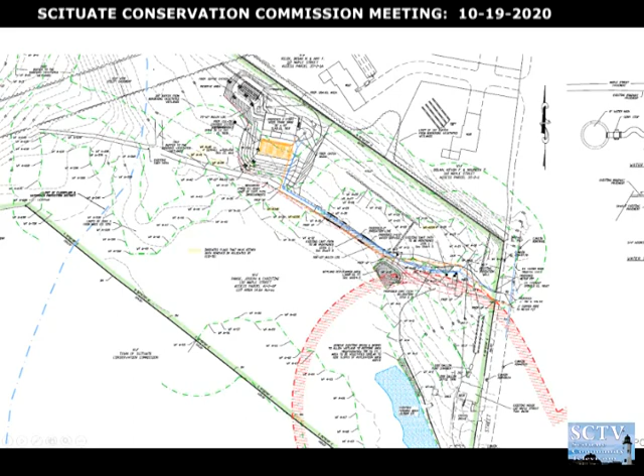So now we're on to 49 Collier Road. All right, this is a new one.

On October 19th, 2020, 5:15 p.m. at the Town Hall, the Scituate Conservation Commission will hold a wetlands hearing under Chapter 131, Section 40 of the Massachusetts General Laws, and Section 30700 of the Town of Scituate Code of Bylaws, regarding the application of Edward Johnson to raze and rebuild a single-family dwelling at 49 Collier Road, Scituate. Abutters and other interested parties are invited to attend. Information to access the virtual meeting will be available on the agenda posted on the town website.

Good evening. Looks like we have Ross Engineering. I don't know. Oh, are they there, Frank? Frank? Yes, Paul. This is Paul. All right, thank you. Got you.

This project at 49 Collier Road is a raze and rebuild of an existing single-family dwelling. For the commission's information, prior to filing with the commission we had 3 meetings with the North River Commission, in which they approved the proposed dwelling. The maximum height is only 35 feet from the finished grade on the riverside to the peak of the roof. The footprint of the proposed house is slightly smaller from left to right - about 8 feet further in depth than the existing one. Prior to filing with the North River Commission and the Conservation Commission, we also spoke to the building department, and after our survey we indicated that the proposed house would not be in the velocity zone.

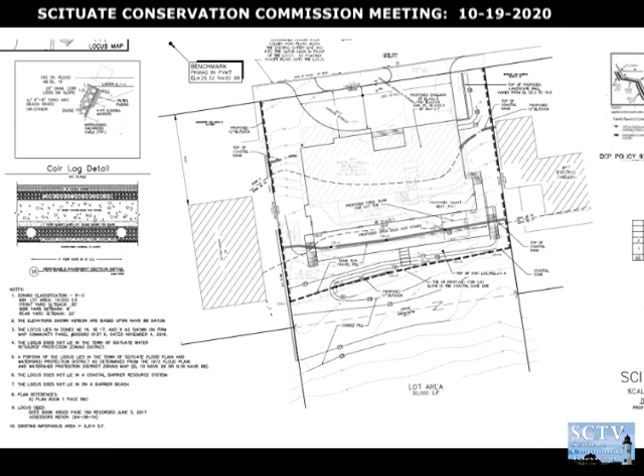That lower portion of the house, where it says open deck and stairs, that's just ground, there's no pavement in there. And the plan you just had shows the hot tub in that area as well, which is outside the velocity zone. That hot tub just sits on the ground.

Sure she can. And the reason we're putting that other plan up, Paul, is it's kind of hard to see on your plan what's existing and what's proposed.

Yeah, there's a lot going on, right? So I just wanted to clear up the resource areas. I believe we agree with Stan that there's coastal dune and coastal bank on the site.

That Penny's talking about is where the toe of the coastal dune is meeting the toe of the bank. You're fading in and out, Amy. Could you hear me at all? Do I need to repeat myself? That's better.

Anyway, so that gully, Penny, you were speaking of, that's approximately where the toe of the coastal dune is meeting the toe of the bank, forming that gully. One of the questions is, we know these coastal resource areas migrate, they move, shift, and migrate—that's what they're supposed to do. So the dune is in fact in a constant state of movement.

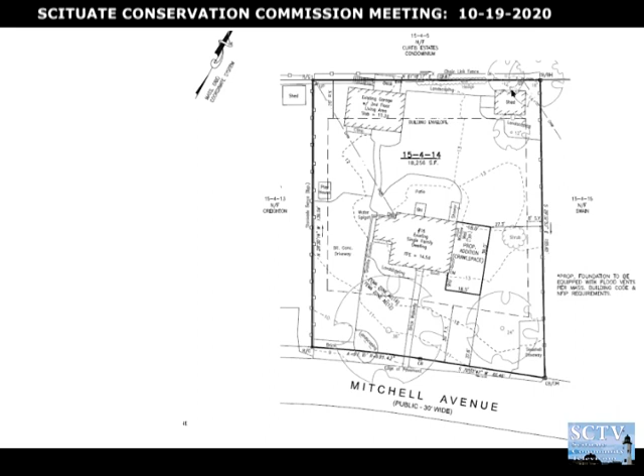So all in favor. Penny? Yes. Jen? Yes. Andy? Yes. Brendan? Yes. Frank? Yes. Great, thank you very much. Thanks, Greg.

Now we're on to 17 Old Farm.

On October 19th, 2020, at 5:15 p.m., the Town of Scituate Conservation Commission will hold a wetlands hearing under Chapter 131, Section 40 of the Massachusetts General Laws and Section 30700 of the Town of Scituate Code of Bylaws regarding the application of Aldana Hamill to raze and rebuild a single-family dwelling located at 17 Old Farm Road, Scituate. Abutters and other interested parties are invited to attend. Information on access to the virtual meeting is available on the agenda posted at the town website.

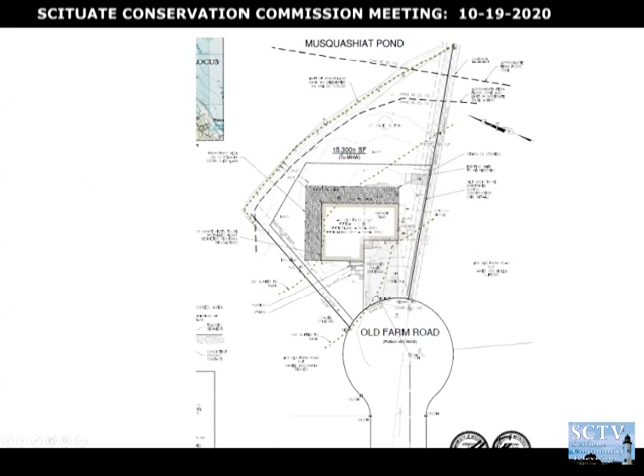So we have an engineer. Yep, Brendan - Brendan Sullivan with Kevin R. Consulting. Hey Brendan, how you doing? Good, how are you? Good. So, geez, I did see the plan just up there for a second.

This is a single-family home at the end of Old Farm Road. Old Farm Road is a dead end off of the northerly end of Hatherly Road. It butts up to Musquashiat Pond. So we're basically taking the existing footprint, the existing one-story footprint, tearing that down, and putting up basically a three-story house with a deck on the easterly and northerly side.

The lot is up against Musquashiat Pond. We have a BVW, we have a floodplain - elevation AE 13 out on the pond side, and then most of the rest of the lot is in elevation AE 11. The existing first floor is about elevation 11.2.

The proposed house's first floor will have no living space - this is the garage. The storage will be at about elevation 8.5 on a concrete slab. The living space will be up at elevation 18.5. We're proposing a new driveway with new access to the front.

We're shifting the driveway off the property line a little bit, reorienting that, and taking down an existing shed that's just outside the 50-foot buffer.

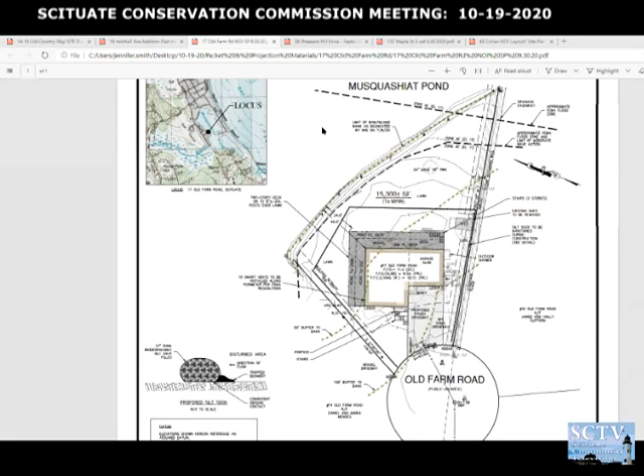14 to 16 Old Country Way. On October 19th, 2020, 5:15 p.m. in the Town Hall, the Scituate Conservation Commission will hold a wetlands hearing under Chapter 131, Section 40 of the Massachusetts General Laws and Section 30700 Town of Scituate Code of Bylaws, regarding the application of Robert Proctor to raze 2 residential dwellings and build 6 residential units and 2 commercial units at dwelling location 14-16 Old Country Way, Scituate. Abutters and other interested parties are invited to attend.

What he's proposing to do is to raze 2 existing single-family dwellings and construct 4 residential units that are attached. They're shown as units 1, 2, 3, and 4 in the plan. And to the rear of the lot, there's a proposed barn building, which will have 2 rental units above the 2 contractors' bays that'll be at the lower level.

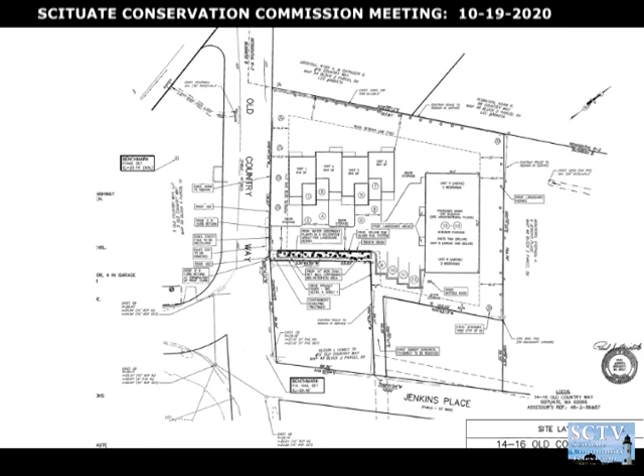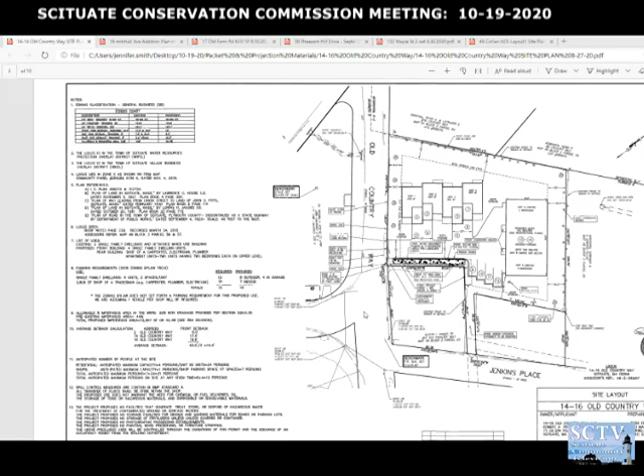That's Jen. There are no wetlands on the site. No, I'm just waiting for the plan. There we go.

Okay, there are no wetlands on the site. The resource areas are actually off-site. As you look at the plan on the property to the right, there's an existing open-ended pipe. The entrance to the pipe is considered the top of an inland bank, which is a resource area. And from there, we show the 50 and the 100-foot buffer zone that do come onto the property.

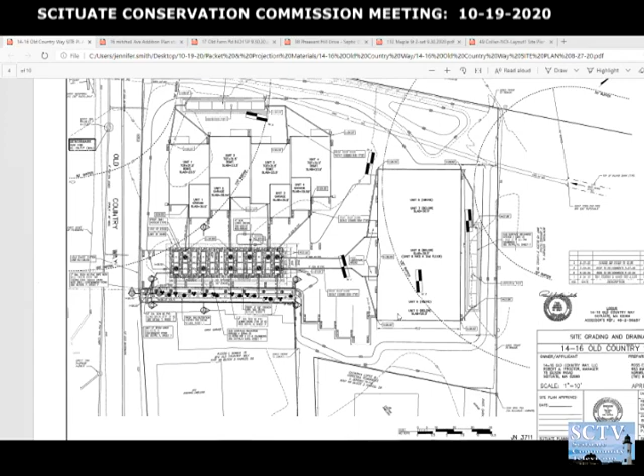On the left side of the plan, over at Old Country Way, there's the outlet of that pipe that runs through the property. There's another head wall where the water outlets. That's also the top of an inland bank. And from there, we show the 50 and 100-foot buffer zone onto the property.

That pipe is completely enclosed to the site. It's a 24-inch reinforced concrete pipe. We did put a camera down it to inspect it and also locate it as well. The pipe is virtually flat. That is not considered a resource area under the DEP wetland regulations.

I verified that with Greg DeCisa and Brad Holmes as well. Reason being that it's completely enclosed and is buried. There are no changes to the pipe. That's going to stay right exactly where it is. So having said that, this project has been resolved to a buffer zone project for work being done within 100 feet of those, of the end of those two head walls I previously described.

To the rear of the property, there's a proposed barn, which will have 2 apartments above it and 2 contractors' bays. The bays have been reduced from 3 to 2. That's an enclosed structure. We're also capturing the roof runoff and putting it into a subsurface recharge system at the rear of the building. That's shown on the plan as well.

Moving over to the left in the other buffer zone, 2 of those proposed units and a small portion of a third one are between 50 and 100 feet of the head wall on the other side of Old Country Way. We're proposing a recharge unit to the rear of that building as well. All of the other work on the site is outside the buffer zone.

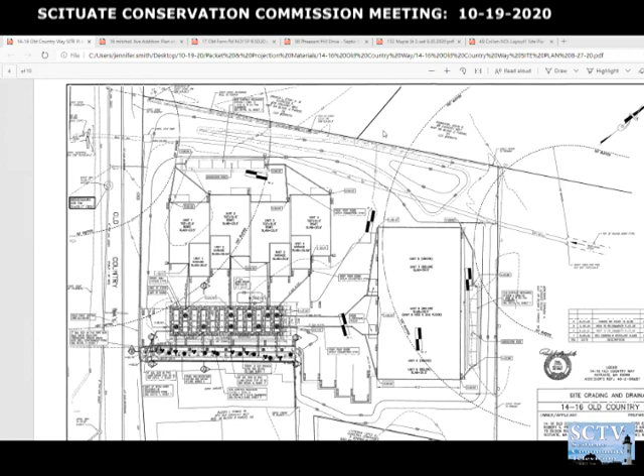Poor Penny, earlier in the day, maybe more like 4 o'clock if we can, since town meeting is that day. Did you guys hear that? Because town meeting's the 16th, we might try to meet at like 4 o'clock on the 16th. Okay, 4 o'clock? Where is town meeting going to be held? Supposedly in the gym, but we'll see. Okay, thank you, all right.

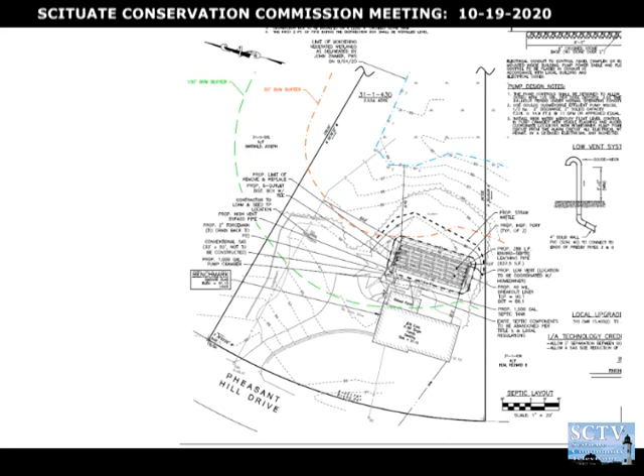So what do we have for business things that we want to wrap up here? We have orders of condition to accept and minutes.

What do you want to do first, Penny? They're very quick. I make a motion we accept the orders of condition for 91 Rebecca Road as written. That was cracks in the piles. Do we have a second? Second, Doug. Thank you. So all in favor, Doug, yes.

Penny, yes. Jen, yes. Andy, yes. Brendan, yes. Frank, yes. Okay, I make a motion to accept the orders of condition for 1 Hollett Street, that's a raise and rebuild, as written.

Second from someone? Who was that? It's me. I got it just under the wire. That was me, done. I could have sworn somebody owed somebody a Coke there, but okay, a second from Doug.

So all in favor, Doug, yes. Penny, yes. Jen, yes. Andy, yes. Brendan, yes. Thank you. Okay, now I make a motion to accept the minutes as written from 9/21.

Do I have a second? Second, Doug. Thank you, Doug. All in favor, Doug, yes. Penny, yes. Jen, yes. Andy, yes. Brendan, yes. Okay, don't really fall asleep. We're almost done. That's it, except the chit chat.